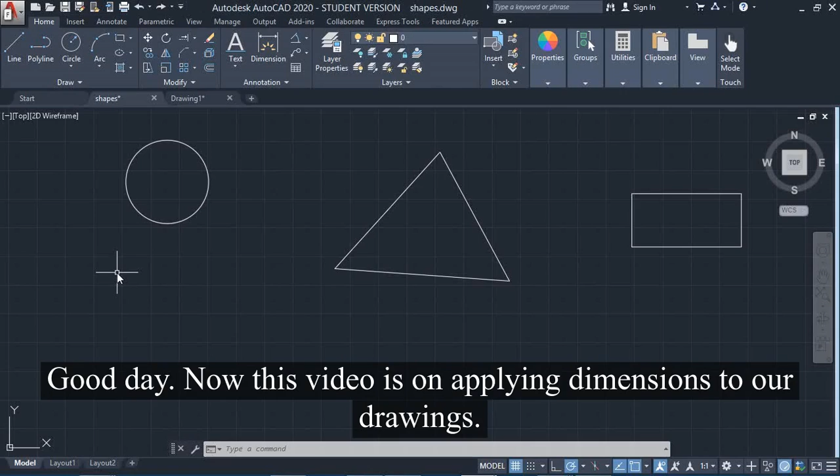This video is on applying dimensions to our drawings. Now, we didn't draw these shapes to scale, we just drew our shapes, so any dimensions we put onto them are just AutoCAD measuring the length of the line or the circle that we drew. It wouldn't have any specific dimensions. When you actually draw a shape to dimensions, you will get that as well.

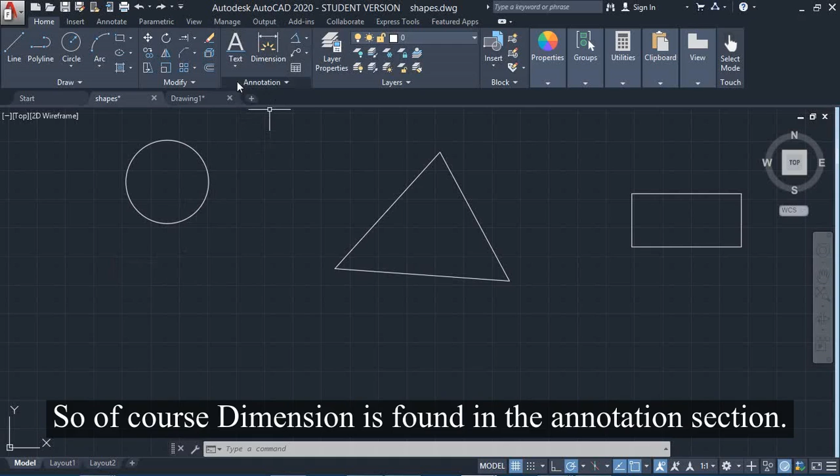Dimension is found in the annotation section. So you click on dimension, then go to the line you want to put the dimension on, move the mouse up, and you see a dimension line appear here. You click, and now you have your dimension line.

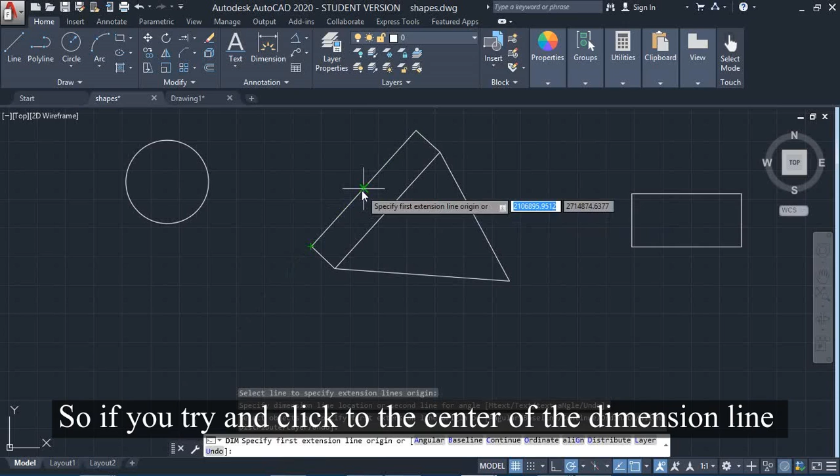Now you are not going to see the actual dimension number just yet because it's very small. It's usually found near the center of the dimension line. So you try clicking and double-clicking near the center of the dimension line, you keep trying until the actual dimension number comes up. That's the dimension of the line we actually drew.

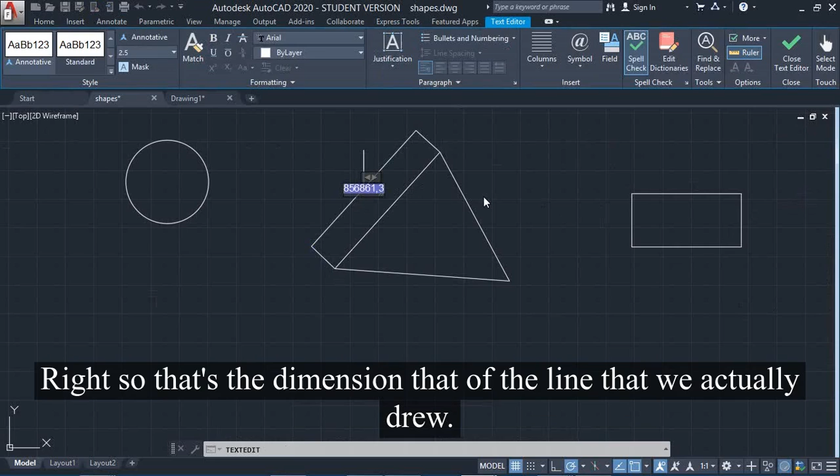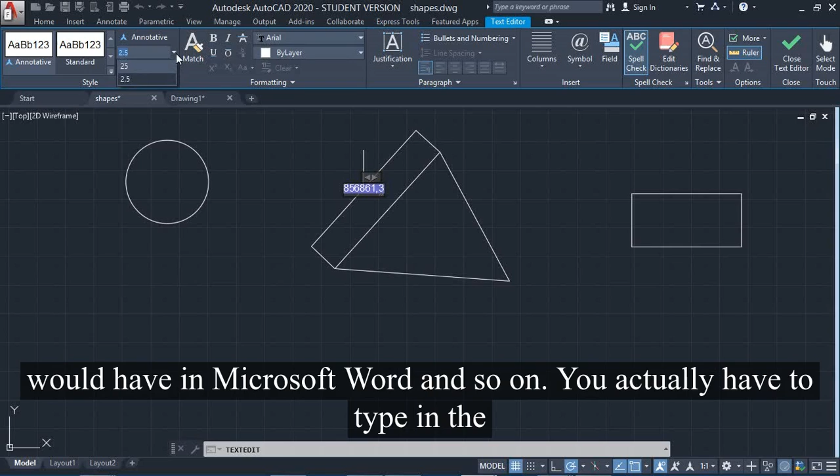Now, as soon as you bring up the text box with the dimension in it, you see the text editor appearing, where you can change the font size, add bold, italic, or underline, change the font, and change the color. You have a number of things you can do with the text. The font size doesn't have a drop-down arrow of sizes like in Microsoft Word; you actually have to type in the number for the font size.

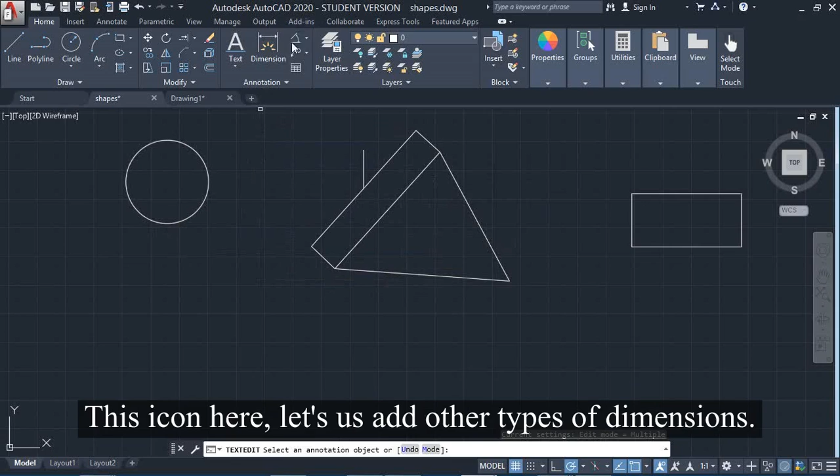Once that's done, you press enter, click away, and you have your dimension line. Now there are different types of dimension lines. We did the dimension line for the side of the triangle here, but you can also put dimensions into your circle. This icon here lets us add other types of dimensions.

If I click the down arrow, you see you have diameter. So you click on diameter, click on the circle, and you see the dimension line appearing there for the diameter of the circle.

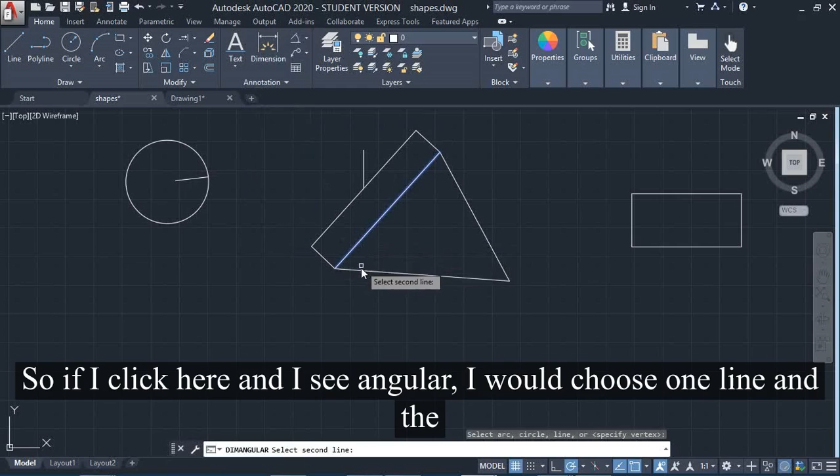This triangle also has angles. So if I click here and select angular, I choose one line, and the second line makes up the angle, and you see the angle appearing there. Again, if you double-click near the center, you see the degrees appearing. So there are a lot of different dimensions you can apply.

So that is using the dimension option that AutoCAD has. In our next video, we are going to be looking at leader lines.